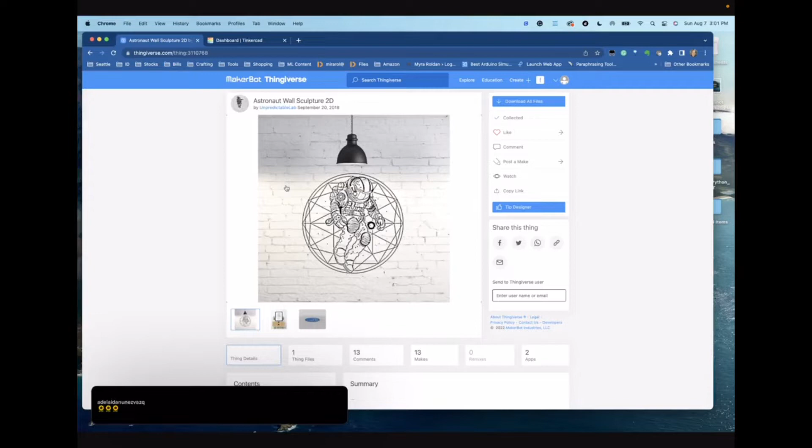On Thingiverse, let's see if I can get to my collection. I got this file here, let me show it to you. This is the file we're going to manipulate today. It's a 2D wall sculpture, and I want it a little bit thicker, and I want it to print larger than it downloads, I think it prints at 6x6, and I want to print it a lot bigger. I've already downloaded the file to my computer, and I have a folder for it since this is where I'm tuning all my files. So here's the file we're going to be working with and splitting.

We're going to scale it first and then split it. I already downloaded the file, so I'm going to put this to the side, and let's go into Tinkercad.

Tinkercad is free software, you don't have to download or install it, it's all web-based. You can use it to edit 3D files but also to create them. I've been playing around with creating some dog tags for my puppy and some NFC rings. I went live yesterday and showed you those NFC rings I was creating, but today we're going to work on this.

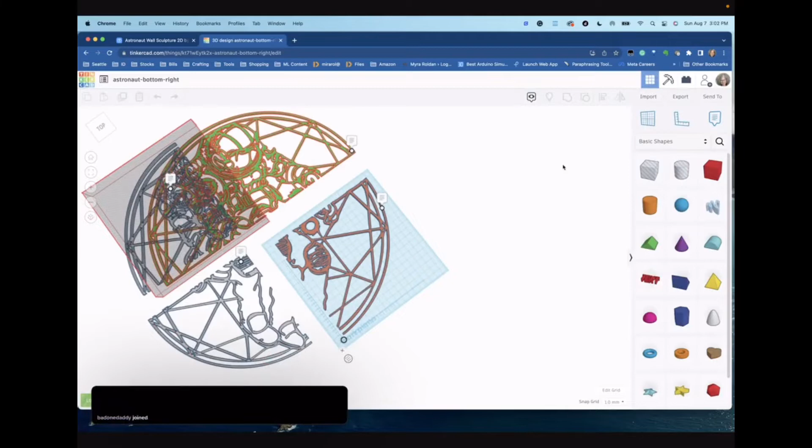I'm going to show you what the file looks like, and I'll walk through how to import it. We'll do this from scratch, but this is the file already scaled and sliced. This is what I want to end up with, and I'm going to walk you through how I did this. So anything that has a color is active, meaning it's visible.

Anything grayed out is not visible, it's considered a hole, which means it won't print or download. But if it has a color, like if I add colors to all of these, let me do that, these will then download as one large file, and I don't want that. So once I get it split, I have to make sure the layers I don't want to download are hidden.

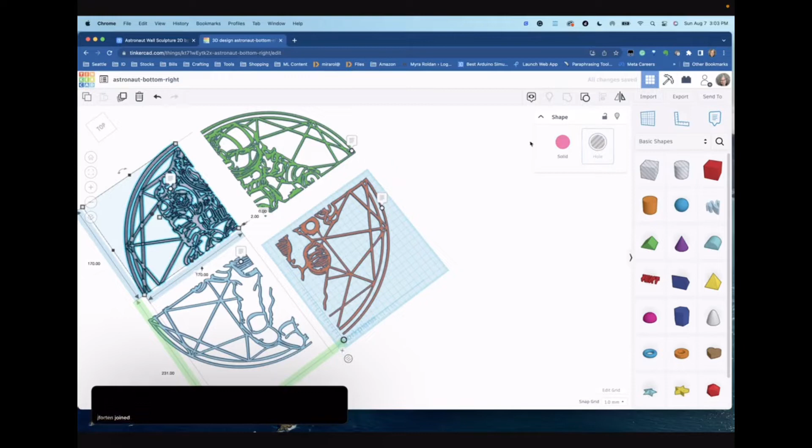The layer I want to download needs to be visible. To deactivate one of these, I just click on it and the menu comes up under shape, and I click hole, which just hides it. I'll show you how the hole is also used to do these slices, because we're going to use this tool a lot. By clicking on the slices I don't want to export, making sure it's selected, I can just turn it into a hole.

So now if I download this file, only the orange part is going to download. Even if the slices weren't on the mat but they were active and visible, when I downloaded the file it would download the entire thing, even if it's on the work plane here on the mat.

If you've never used Tinkercad, this is to edit, build 3D objects. I like Tinkercad because it's simple to use. They use this with elementary school kids, so I figured it'd be easy enough to show here too.

I'm going to show you how I did this process of scaling, and we're going to create a new file. So I'm going to go over here and go to create new design. This is going to open up a new work plane for me, and I'll walk you through Tinkercad, it has a home button.

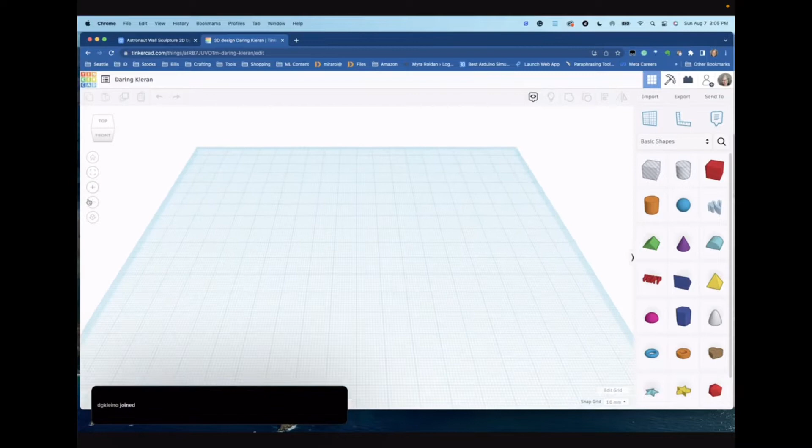It has this fit-all-into-view, which is the view we have right now. You can zoom in and zoom out. And this button here switches it to a flat view, but we don't want to switch it to a flat view.

Up here you can rotate your work plane in Tinkercad to see the top, the bottom, the front when you're working with a file. Then you have these shapes over here, and you can create new 3D files using these shapes.

This up here is a work plane, so you can switch how it appears on your screen. There's a ruler—I'm going to drag it over because I like to use it. I just place it. Notice it doesn't fill the entire plane, but I can move it around by dragging this little red circle. This is a great tool to use when working in Tinkercad.

This here is just to add comments to whatever you are making in Tinkercad, so if you're doing anything special, you can add notes to it. Think of it like a programmer adding comments to their work—same idea here.

Up here we have import, export, and send to. We're going to be using import and export, and there are more items up here, but we're going to keep it on the work plane. There's a Lego view and a blocks view also—the blocks view is like Scratch.

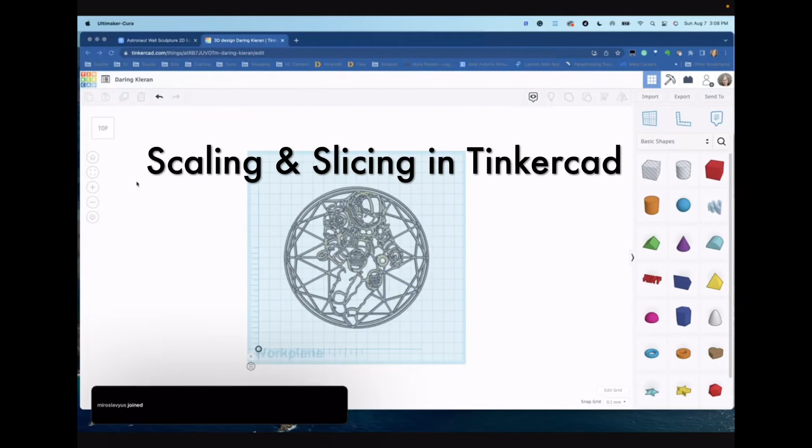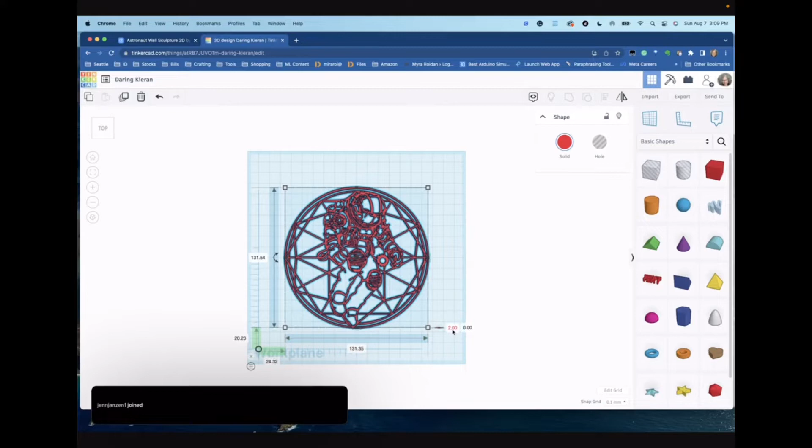Okay, so we have the file in Tinkercad, and I'm going to change the color just for the sake of this—so all of the file is now active. If I click on the file here, you have to click on the space. Notice that the X and Y axes have numbers here: it's set to 131.35 by 131.54, and the height is set to 2, all in millimeters.

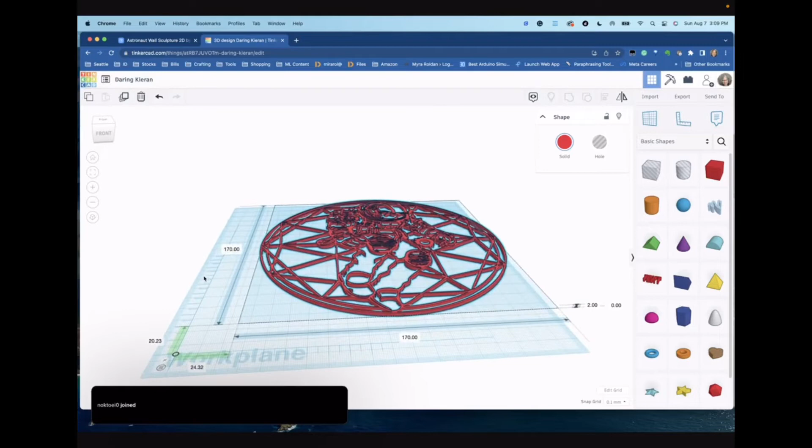So I'm going to make this 170, just to see what it looks like set to 170. And then I'm going to set the height to 5—but before that, let me show you the height on this thing. Okay, so the height is set to 2 millimeters here, and you can see the height.

So I'm going to change the height to 5—let's see what that does. So I like the height on this. This is something I would put on my wall once it's printed.

I'm going to print it in parts because I want to print it pretty large. Once I have those parts, I'll print it, and then use either some UV resin or some glue to put all the parts together to create one larger project.

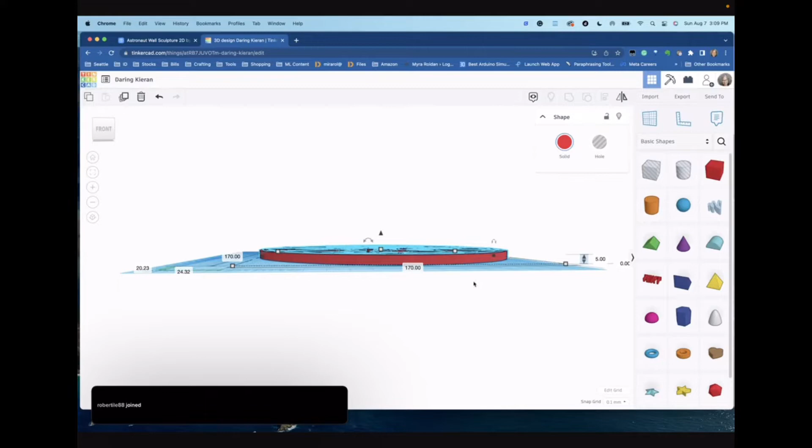So let's go over here. So this is, we've scaled it, right? And now you can scale it bigger if you want, but for the sake of this, I'm going to keep it at 170 by 170.

Once I have all the slices done, I will make each slice 170 by 170. I know this is the size each slice is going to be, so I want to make sure it fits in the mat. That's the purpose of doing this right now, so I can make sure the slice size I want will fit on the mat.

So now let's just slice this. I'm going to move this around here and decide where I want to slice it. I'm trying to get a middle point. So this is the middle point up here, this little red dot.

I want to get that on one of the lines so I can use it as my point of reference, the center. Let's get a center line down here. I'm using my arrow keys right now to move this, to nudge it. Okay, so now this is my center line up here. Let me unclick it.

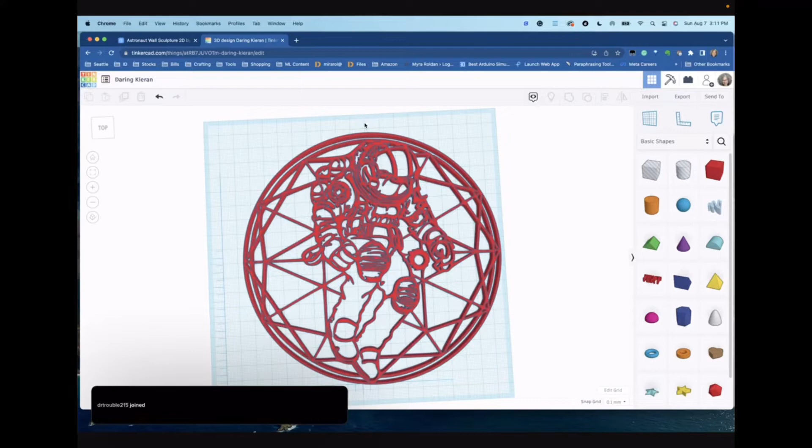This is my center line right here, on the third one here. And then this is my center line right here. Right now what you could do is lay a piece up here.

Let's see if I can find something that's good. There are different shapes in here you can use. There are basic shapes, and these design starters with different structures and sceneries. These are all things you could print fairly easily with little effort.

But I'm going to go back to the shapes and drop a cone. I know this is weird. I'm going to drop it up here because this is my middle mark. I'm just using this as a reference for myself, so I know this is my point right here.

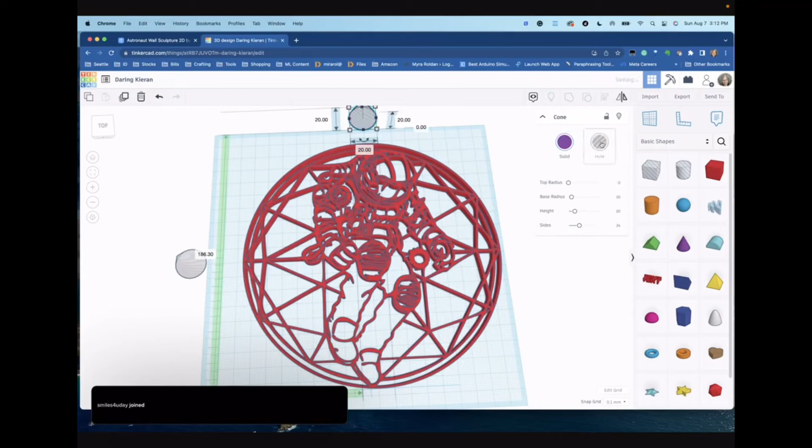And this is just me, you don't have to do this. This is just me because I will forget which are my reference points. So I'm going to put this one here, so I know this is my other reference point. And then I'm just going to make it a hole, so if I forget to turn it off, it won't export.

So now the next thing I want to do is make 4 slices. I'm going to copy this image file 4 times because I already have it set to the size and height that I want. So I'm going to duplicate it 4 times, make 4 copies of it.

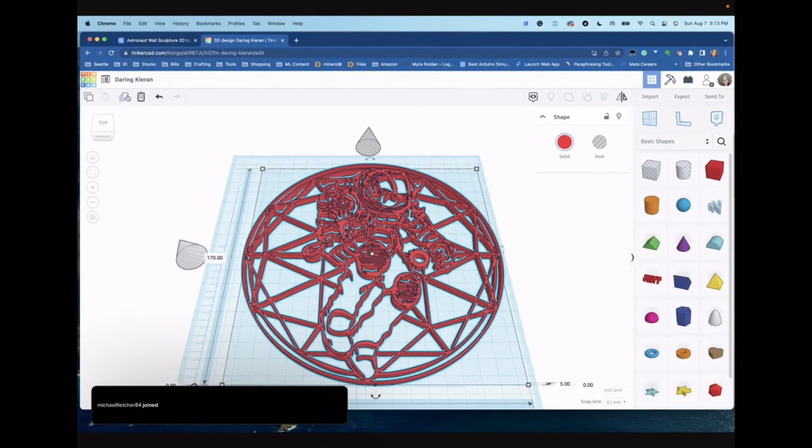I'll move the other 3 copies off and you'll see why I do that. Maybe we'll just leave them on there so you can see also. So I'm going to do 1, 2, just stop, and then 3. So there are 3 copies on here. You can't see the copies, but they're there, trust me. Let me just make my plane a little bit bigger and I'll show you.

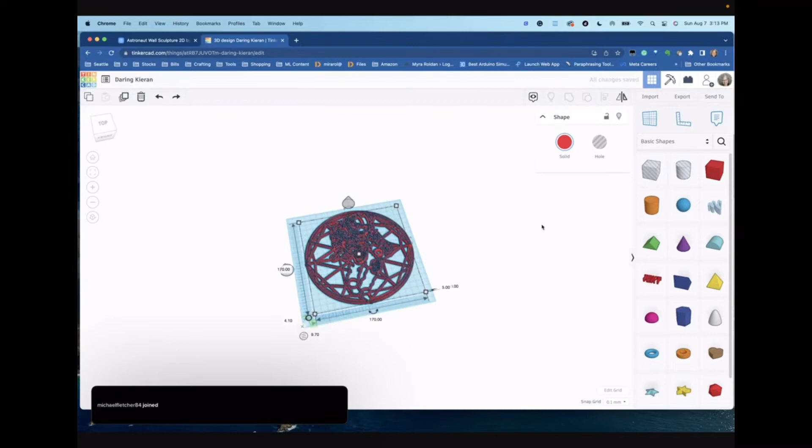So if I go here, select it, and I should just be able to move. Oh, I selected all the copies, I'll select one. My arrow keys aren't working right now. There you go, so that's one of the copies. Okay so there's 4 copies there. So what I'm going to do, I should have left that one out.

I'm just going to move these out because I'm not going to use these right now. Let's set that one back to the size it was supposed to be at. Move one last one out.

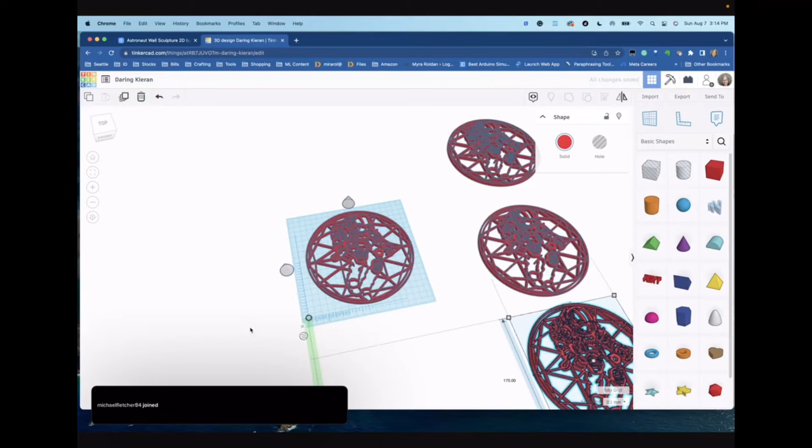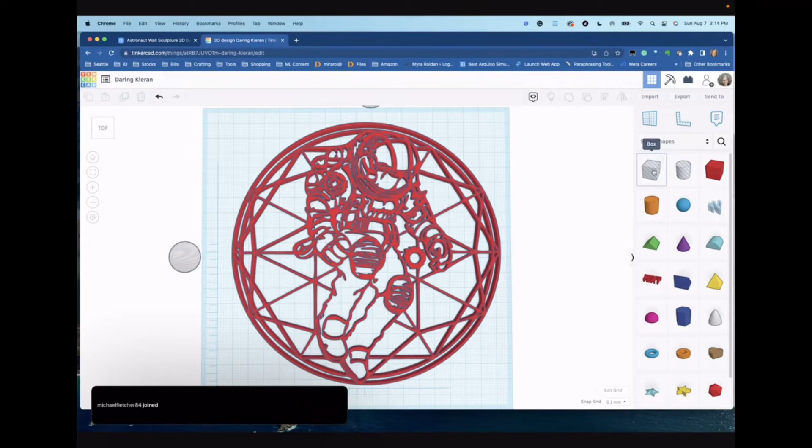So I'm going to click on the box here, and this is a hole. This block is an actual hole. I'm going to click it and drag it on, and anywhere this hole appears is going to be split. So I'm going to go to the line because that was our marker, and then go down to our next marker, which is right here.

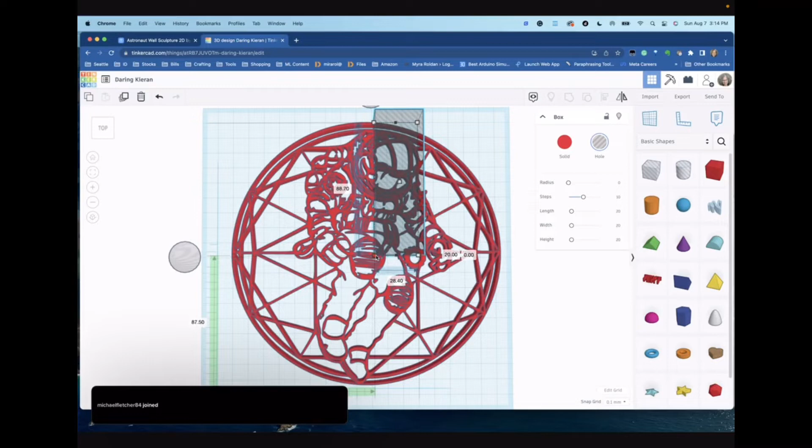Okay, move it over a little because I threw it off. And then I'm going to extend it so I cover all of the red that I want to delete from here. So now this portion where the block is over is going to actually be cut off.

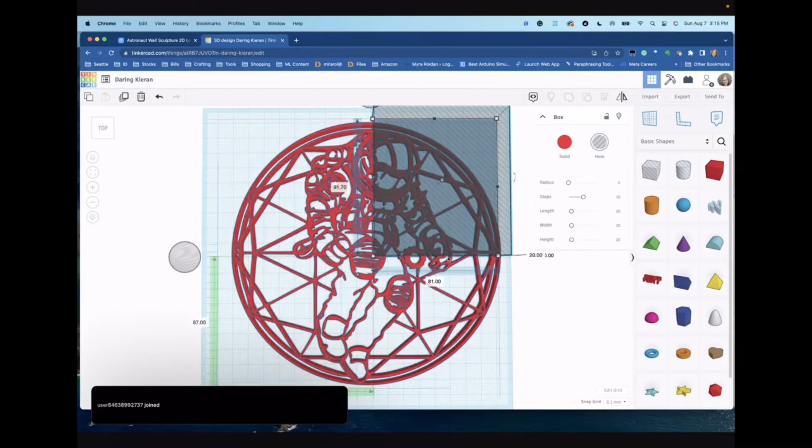So what I could do, for the sake of time, instead of doing it three times, I can do it twice and just extend this down before I cut it completely. So I'm going to extend it down because I want this gone.

And then I'm going to do it one more time, but for the bottom down here. Where was our marker? Right here. I'm going to extend that.

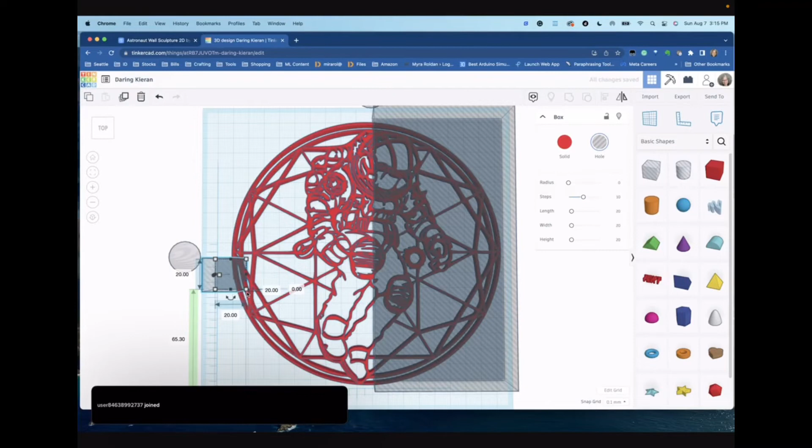And so anything that is covered by the gray holes now will disappear. So now what I need to do is select it all.

And not this guy here - make sure my other guy isn't selected. Okay, and then I'm just going to connect them, group them. And now wherever those gray boxes were, those holes, those are going to be removed from the image, or from the 3D object, and I'll be left with just the one section.

And it'll take a few seconds for it to work. So if you're doing this, don't panic, because it's just a lot of information it's trying to go through. Okay, so now you see we have our one slice.

So now the next thing I'm going to do is I'm going to make this slice. Let's see - oops, no, I don't want to do that. Now why didn't this slice? Oh, I see what I did - there's still a tiny piece here that I need to get rid of.

So let's do that - let's add a hole here. I'm just going to cover it all the way up. Let's intersect it.

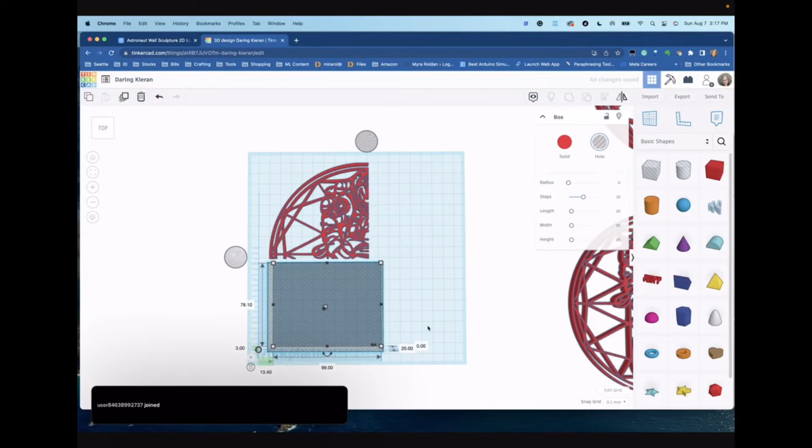Let's select it all - you need to make sure all your pieces are gone, because it will. Okay, I'm going to get rid of that one. This doesn't like it. Okay, let's get our little piece in here.

Okay, we're going to have to undo it just because it's seeing it as one group. Let's just do this, let's bring this down. It's picky, it's persnickety. Okay.

And now let's select it all, and let's intersect it again. And with this, to me, this is cathartic, guys - working on stuff like this. It just gives me something to kind of think through.

And so one thing that I just did - I'm going to undo this - is that I went over my marker here. I caught that too late. And go back - the good thing is you can just Control Z to undo, and it brings everything back to original.

So it's like the same commands you use for Word or any kind of doc editing. You can use those same commands. Control C works also, Control V works.

Let's do it again, let's see if I did it right this time. Let's see if we're left with just that one corner - that's what we're aiming for, just that one corner.

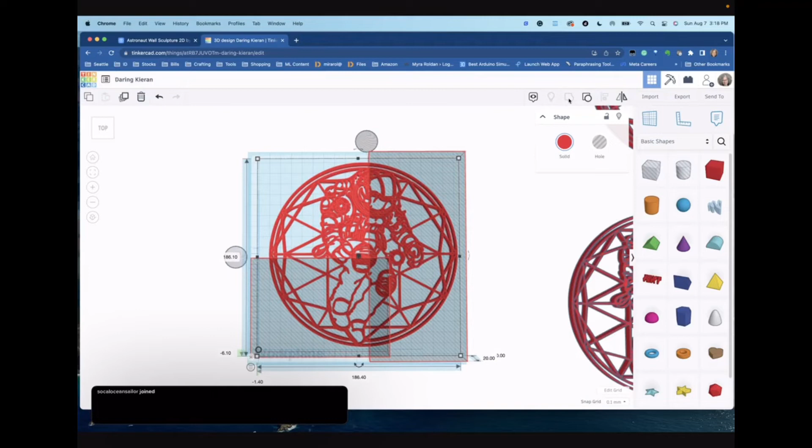Okay, so now the block - so now we're left with a true block. So now what I'm going to do is resize this to 170 by 170, because I know it'll fit on my map, because we tested that, right? And there we go - so this would be one file that I would then export.

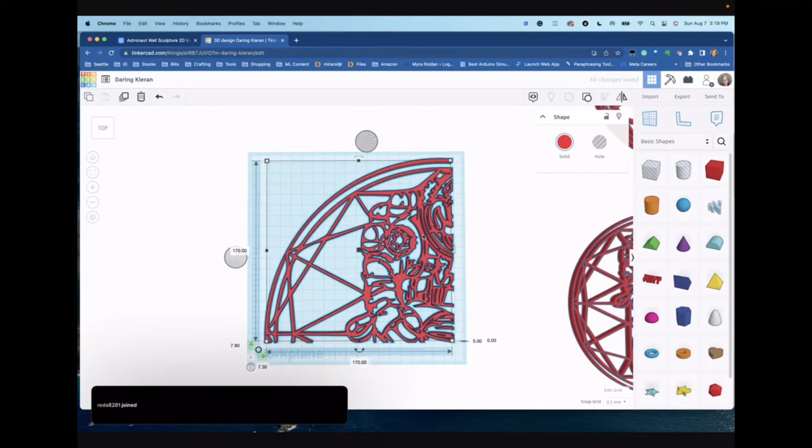So the next thing we need to do - let's say I wanted to export that - I need to hide these other files. So let me click these so I can hide them. Okay, come on, select - and then we can hide these.

So now the only thing that would export is this piece right here. So to export it, you give it a name - I'm just going to call this Astro, this is top left. So make sure to name your segments also, so you know what you're doing.

The other thing I'll do is add a comment to it so I know what segment it is. I'll put it on the space, and I'll put 'Astro top left' here, because I'm going to keep it on here, but then export it. You want to hide your comment also, just to make sure nothing janky happens, and then you can just export it.

I'm going to export mine as an STL file, and it'll prep your file and download just that one part.

So it'll take a second for it to download. You're going to follow that same procedure with the other three parts. You just want to make sure you line up, find your center marks where you had it, line it up to those center marks. You might need to eyeball a little bit to make sure you're getting the right parts, so when you print them, you'll be able to connect it easily.

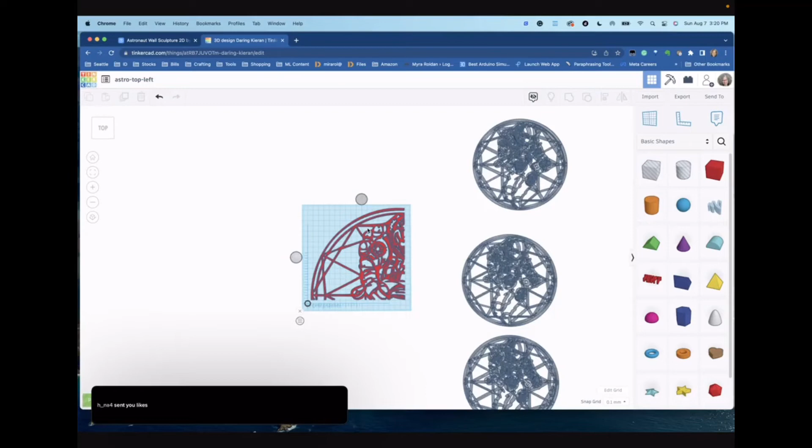It's okay if you overlap a little, because you can actually just sand down any kind of overlap to make the file the right size. So we have that one segment done. What I'm going to do is move it over, and then turn it off. I'm going to turn it off by hiding it, right?

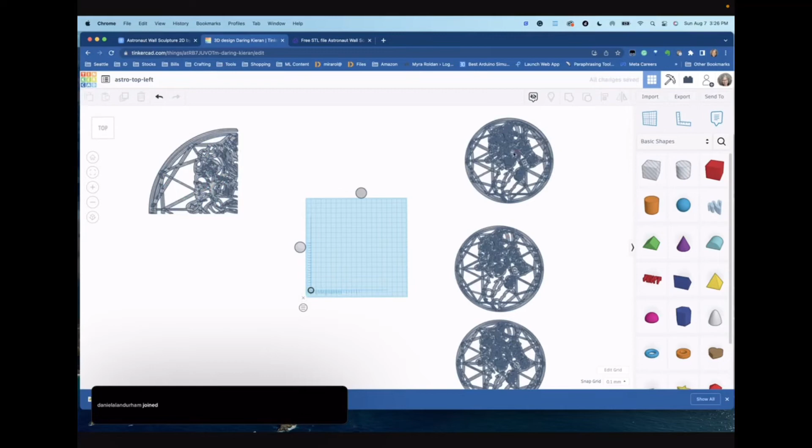Making it a hole. So now we can take another copy here. I'm going to place it. Let's zoom in a little. Okay, so this guy was a little bit higher, so we're going to move him here. This is where having the markers comes into play, because now I know where my center is and where it needs to be for that middle line, so I get accurate cuts when I'm splitting this, right?

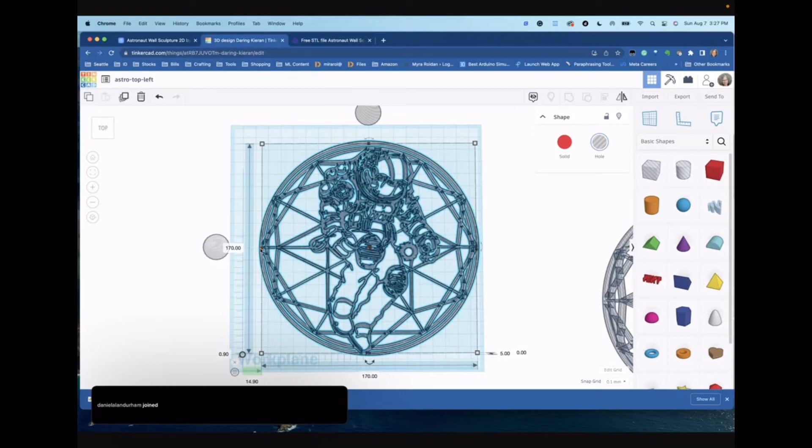So this is where it was on the original. Let's just make sure here. Yeah, that's on the line. Okay, I'm just playing around with it. Now I'm going to turn it back on. So now it's colored, so it's on again. So now I can make a cut on this.

And we're going to do the same thing. We're going to grab a block and put the block over, let's do it over here.

Stella just busted into the room, so she must want something. Okay, what's the matter, Stella?

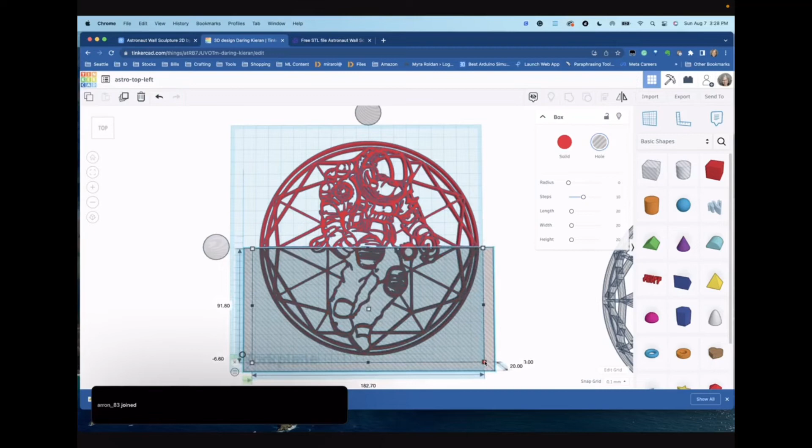Okay, and we're going to cut this here. Let's do it in segments this time, just so I can show you. So I can cut here and just select all and then group it.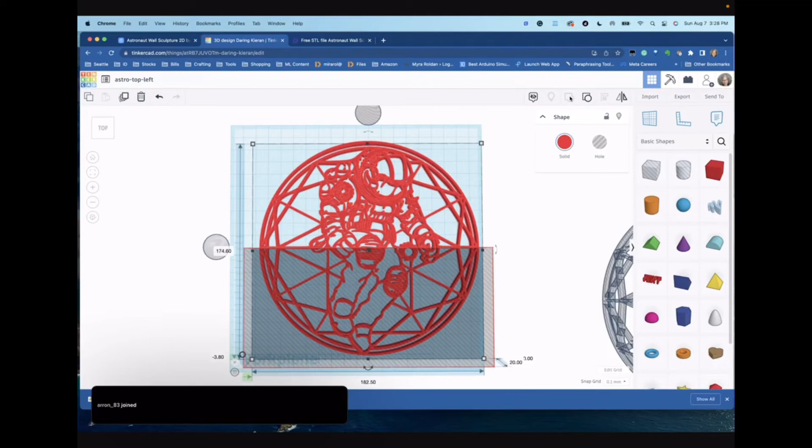And again, this can be tedious, right guys? But I think if you want to make sure you get the cut you want, if you want to print some large items, this is really important. And so also the settings on your printer are going to be important to make sure that your print actually prints correctly.

Okay, so now we did the bottom part, and now we're going to get rid of this side because this is the side that we already made. So I'm going to grab a cube here, my last one, and bring it down and over to the line right there.

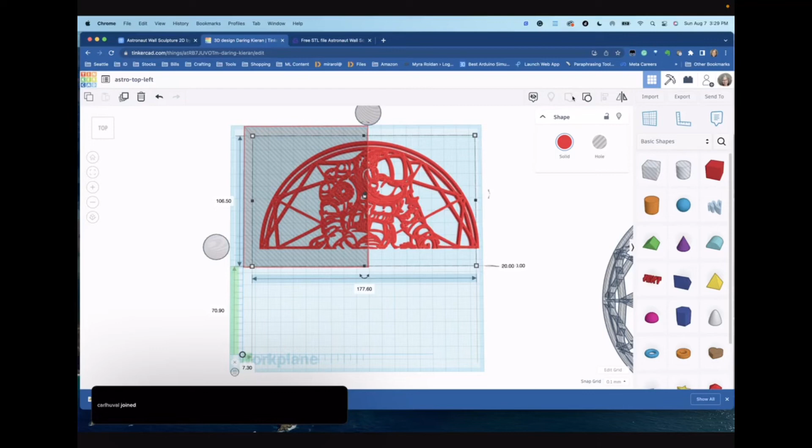Okay, and then we're just going to select - you can follow any method that works for you - but what we're doing is just splitting this file into 4 so that I can enlarge each section and end up with one big file that I can glue together. So I'll have 4 parts that I can either glue together or use, I'm thinking about using UV resin to actually put them together.

So now I'm going to change this to 170, and this one to 170, and move it down here.

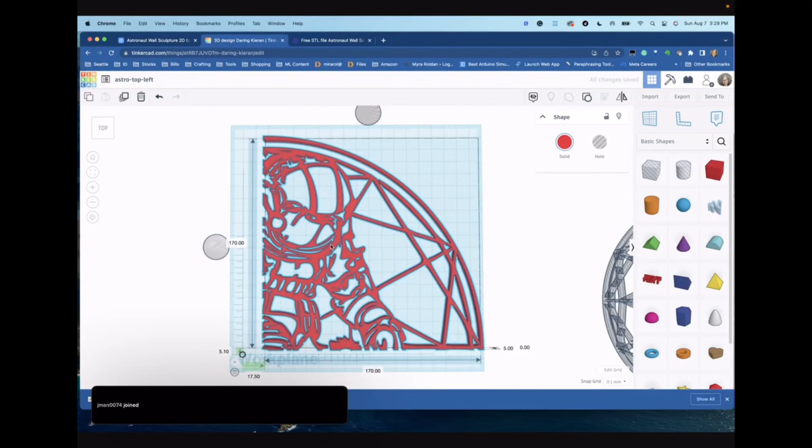So now the cool thing is, let me zoom out. So now if I bring this file down here, I'm going to show you, they should connect fairly well. And you may have some overlap, which is fine because you can actually cut that out, and that's why you have the reference.

So I see that on this file, I might need to cut out the circle here. So let's just see how much we need to cut out. Let's drag it over. That's a slow drag, let me increase my... okay. All right, so it looks like I gotta... oops.

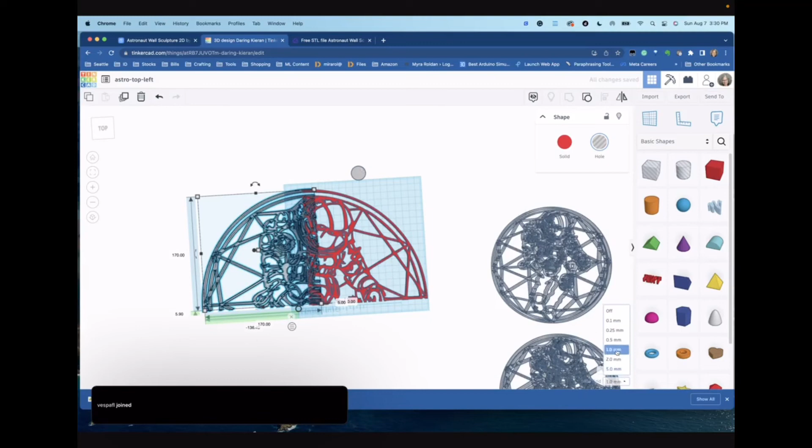So over here on your grid, you can change the size of your grid, and it kind of helps you figure out how fast your cursor moves when you're using the arrow keys. So now what I'm going to do is just add the block over here. Now I left the segment that I'm matching up to off, right? So it's hidden, so when I do this, it will only impact the segment that I selected.

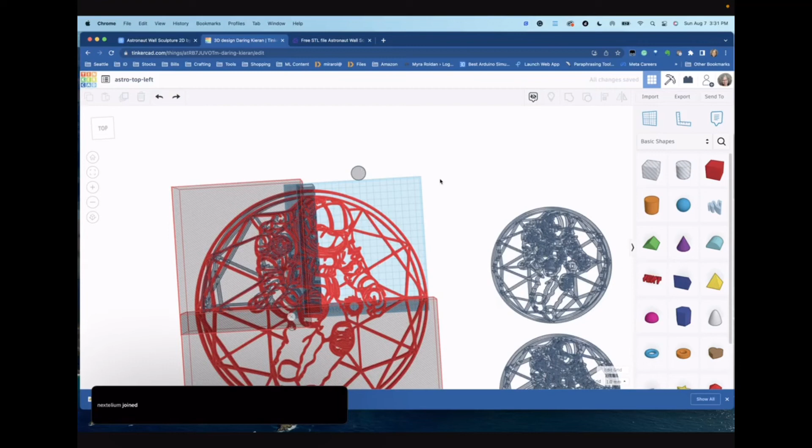And so now I should end up with a good print, something that butts up to each other pretty well. All right, so there you go. All right, that looks decent, right? Might have cut off a little too much for the hole, but I can go back, like you can go back this way. No, we don't want to do that. Let's go back that way. Okay.

Let's click on this one. And let's undo - just want to see what that hole looks like. Yeah, so it looks like we got to keep part of this.

Let's do that. A lot of this, guys, this is not fast work. It's not anything where you're gonna be like 1, 2, 3. In some cases it might be, right? This file is a little bit more detailed, so you want to take your time with it to make sure you're getting good cuts and that what you're gonna end up with is a good product. So what we're doing is enlarging this one file, making it big so I can have a wall piece, but cutting it into 4 segments and then enlarging each of those segments to make that big file.

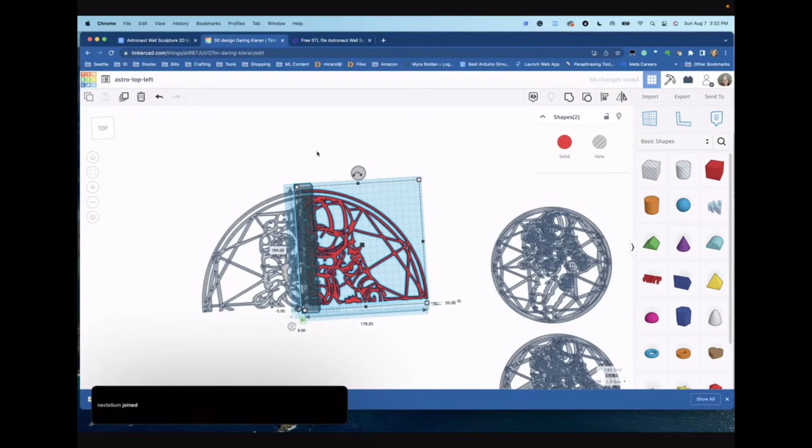So let's see, oh I didn't hit group. Ooh, don't know what happened there. Hold on, that was bad. Did I change this to... hold on, oh I turned my layer off. I didn't mean to turn my layer off. Okay, there we go, see? Not paying attention to what I'm doing. Click here, group. Okay.

And I think Stella's hungry, guys, because she's licky right now.

Okay, so now, okay, there we go. So that looks better, right? So now it butts up really good. And we'll do this same process for the other segments to ensure that we end up with something that looks really cool. So I'm going to go back and show you guys one that I already did.

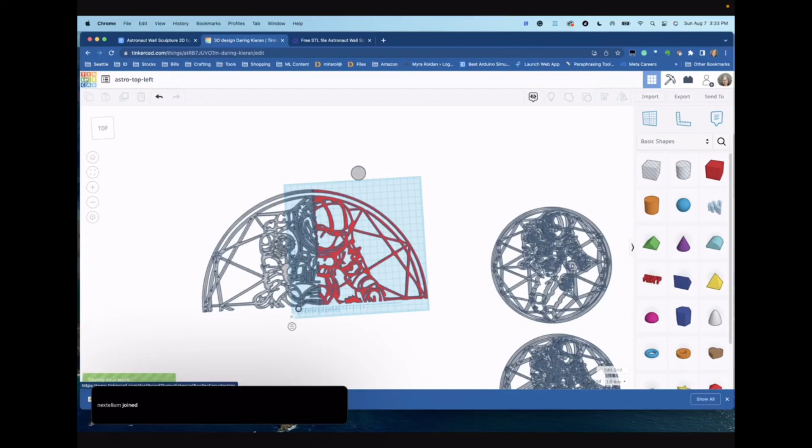Right here. And again, Tinkercad is free.

You don't have to install anything. It's a great tool to learn with. So if you're just starting out with 3D printing, they have some tutorials you can go through. But I think for working with files, like I'm on a Mac, there are some great tools out there you can use to actually manipulate your 3D objects and split them and stuff like that. But I'm on a Mac, and some of the better products are made for Windows. So like Mesh Mixer is a good one, but it's a Windows product, so I can't use it on Mac, and I don't have a Windows computer. I'm purely a Mac user.

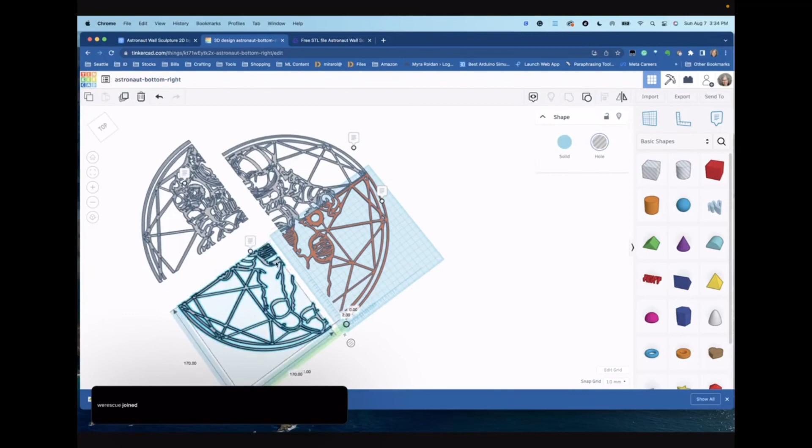And overall, let me just show you here. This is what you want to end up with. See if I can line these up really good. And then I'm going to turn on the colors so you guys can see. I don't know how I lined them up originally, but let's see. Okay, so these are the 4 segments, and I used that same process I just showed you to divide this into 4 segments that I then bring into Cura.

I'm happy to do more segments on Tinkercad, and we can figure out how to build something in Tinkercad from scratch, or how to manipulate additional files in Tinkercad. We can probably do a bust and figure out how to add lights to it, meaning how to add holes to ensure you can add LED lights to the bust. I have a Darth Vader bust that I was going to do that with.

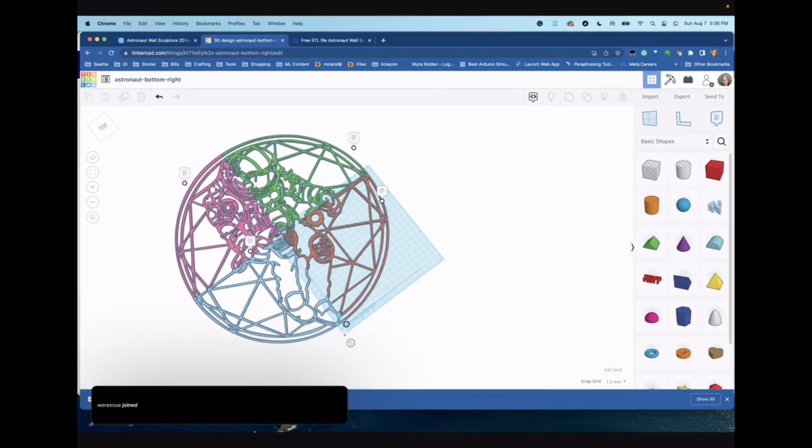Let me just show you guys that really quick. Again, I didn't make the Darth Vader - these are files that I got, I think on Thingiverse also. This is 2 parts, I was just playing around. So in this one, I think I'm going to add LED lights to the eyes and probably the chest plate. This is something I'm actually thinking about printing for Oscar, my partner, so he can have it in his office, making him a cool bust. I would print this all in black and then add the LEDs to add some interest to it.

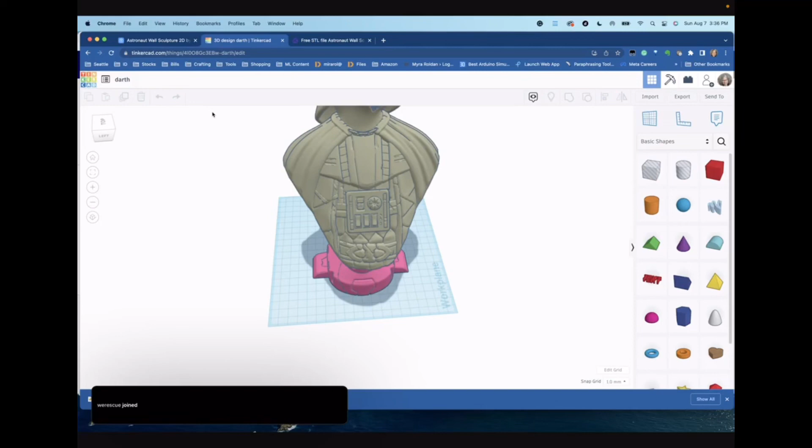So guys, that's it. I hope that you found this useful. If you have questions about this, post them. Know that I am not saying I am an expert in 3D printing. I am sharing with you the things that I do know and that have worked for me. I hope that this would work for you also. And if you're interested, let me know.